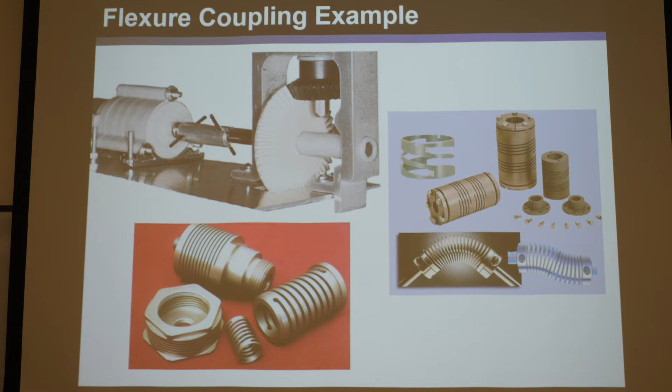Okay, so that's a great application for flexures, compliant mechanisms. These are some commercial flexure couplings. We're going to design one ourselves with FACT. Okay, so here we go.

All right, so say we have this shaft. Say a shaft goes through there and the other shaft goes through there. And we're going to design the flexures that join these two rigid bodies together so that they do the job of a flexure coupling. Well, remember the first step of FACT is to pick what degrees of freedom you want this flexure to achieve. And that's sometimes the hardest part of the FACT approach, so make sure you pick your things wisely.

In the case of a flexure coupling, this is the degrees of freedom you want. What you don't want is a red rotation along the axis, because that means it can compliantly deform with the rotation. You do not want a red rotation along that axis. You want it to be very stiff so that when this rotates, it passes that torque, it rotates right on through stiffly.

What you do want is compliance in all the other directions, right? If it's slightly misaligned at an angle, you want the two rotations here, so that as the motor spins, it can go on the off-axis shaft of the other part, and you want to accommodate the three translations in all the directions. So if it's sheared off a bit, it accommodates that, or if they're not bolted at the exact distance apart you wanted, it can accommodate that as well.

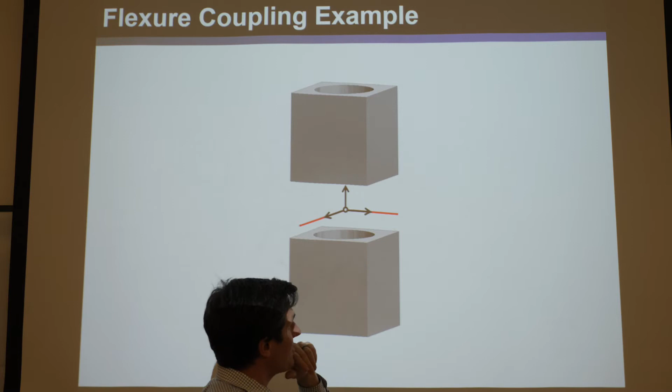So you've got 3 choices here. It's one of these things, and there's always one right one, of course. You can pause and see, go back and tell me which of these is this one. Well, you could look at this and say, what's 3 arrows added to each other? Well, it's a sphere, and right off the bat, there's only one sphere in here. It's right there. So you could know right away that's the right one, and take a look at it.

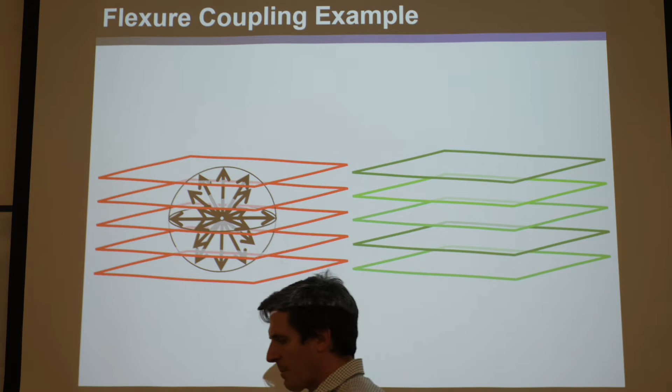So if we blow that up, here's the freedom space. It's basically a bunch of infinite parallel red planes with a sphere of black translation and a bunch of infinite parallel green screws, where there's screws all over the place. Notice I draw them in slightly different shades of green to show that they can be planes of any pitches. I do different shades of green for different pitches, but there's no rhyme or reason to the shading here. It's just screws of any pitch on these parallel planes. Okay, so that's that freedom space.

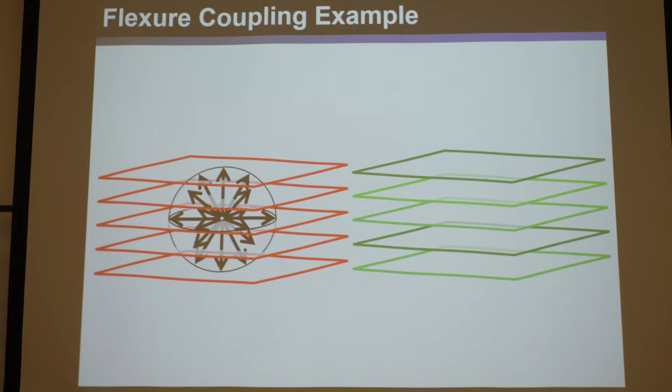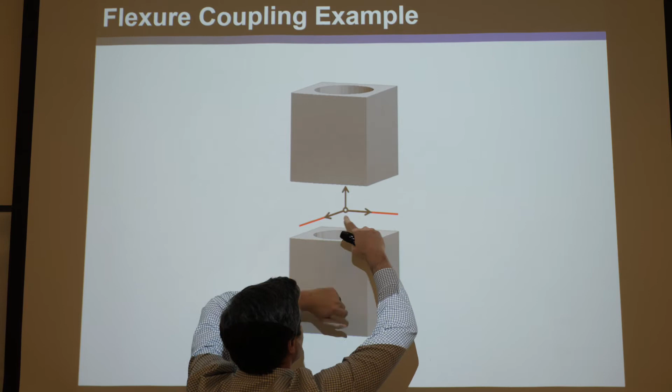Now you might ask yourself, how does this work? You can see how if you add these 3 together, they make the sphere. But think how do they get the rest of it? Well, if you add this plus this one, you get a bunch of red parallel lines that add all together and make this, and that makes a red plane, right? And then you could say, let's take this one plus this one. Well, it makes a bunch of red parallel lines that go up like that. And you do the same thing for this one, and so pretty soon you fill in not only the sphere but all these parallel red planes.

So I'll go back and show you. That one linearly combines, and that's all the combined motions you get. So if someone says I want a flexure coupling that just gets these, you say, well, that's great. You can get those, but you also have to get all these. There's no other way. That's the linear combination of them.

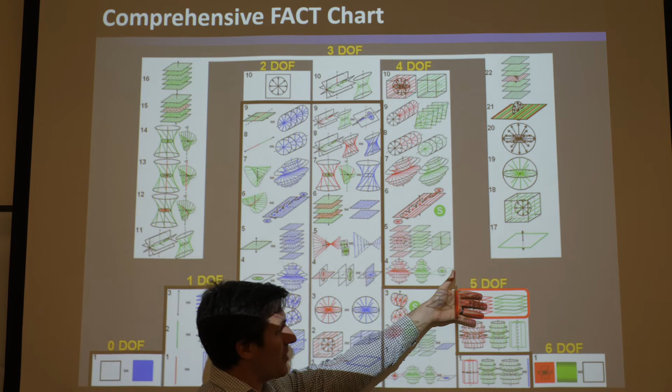So again, when you're synthesizing serial systems, you say, what do you want? And you find the freedom space. And you notice already, this guy, the freedom space you want, is it inside the parallel pyramid or is it outside the parallel pyramid? Well, it's clearly outside the parallel pyramid. It doesn't have a constraint space. You can't design a flexure coupling that gets that freedom space unless it's serial or hybrid, right? You can't do it with a parallel system.

So that's the first thing like that. Of course, that's why I picked it for this lecture, because you needed to do a serial system, and this is about serial synthesis.

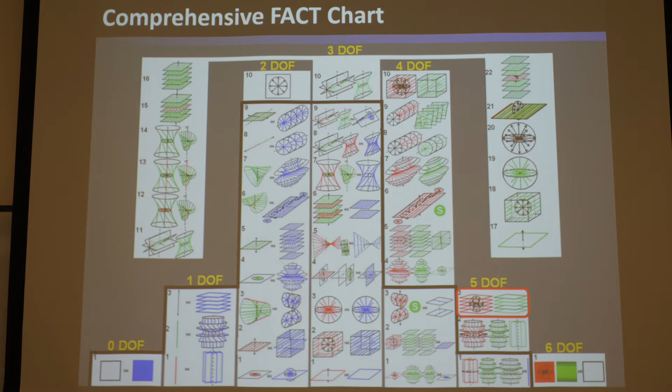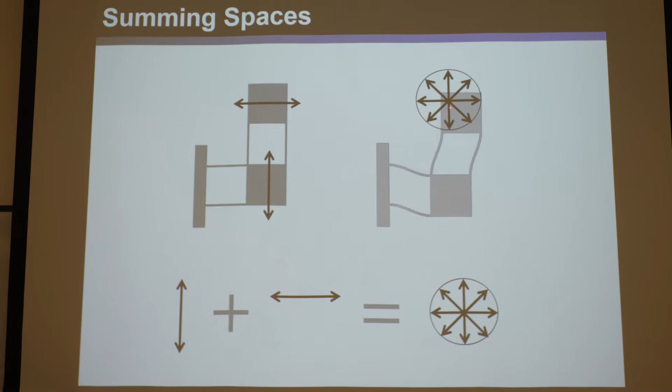Okay, so then what you do once you have the freedom space is you realize, well, look, if we want this freedom space and we want to make parallel modules stacked together that together achieve this freedom space, let's break it into intermediate freedom spaces. Take this and break it into these two intermediate freedom spaces so that one parallel module will get this, one parallel module will get this, and then together they'll get that.

Well, let's take this and break it. This is very easy how to break it. But let's take this, and there's many different ways you can break it. And the number of things you break off of it is the number of parallel modules.

So let's say you want just 2 parallel modules stacked in series, because obviously the more parallel modules you get, the more complicated the system gets. Generally, if you're going to design a serial system, you want to only have 2 stacked stages, because 3 or more would complicate things. Now, sometimes there are good reasons to do more than 2 parallel modules, but generally it's a bad idea. Okay, so let's just break this into 2 intermediate freedom spaces.

Many options, but one could be, how about we take one of these from this top plane? And by the way, there's no such thing as top; those planes span to infinity. But let's take it from this plane with the translation there, and then we could take the exact same thing from a different plane, just there. So two planes, we could take those.

Okay, these are 2 intermediate freedom spaces, and hopefully I can convince you that not only do these both lie within this, which of course is a condition for an intermediate freedom space, but the 2 have to add together to become this. So that if you have one intermediate parallel module that gets this, another parallel module that gets this, stack them together, you want them to linearly combine to be this. So they have to lie within it, which is obvious, they do. But do they add together?

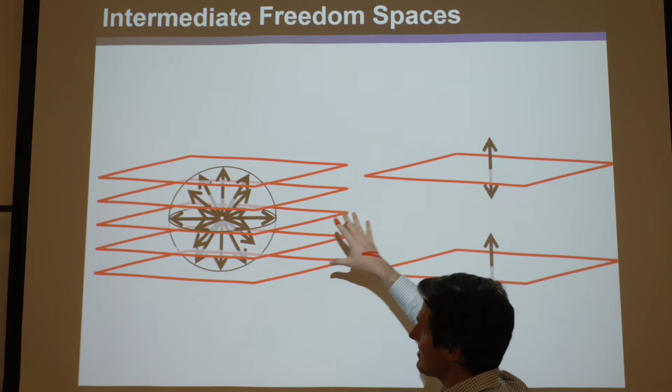So hopefully you can see very quickly, you could linearly combine these together to make that. So those are 2 fair intermediate freedom spaces that both lie within it and linearly combine to be that. You add them together, it does indeed equal that. So great. We could, and again, like I said, we just picked 2 of the same one and just located differently. They were both even oriented the same. That's okay. You could pick different ones. There's no rule on that.

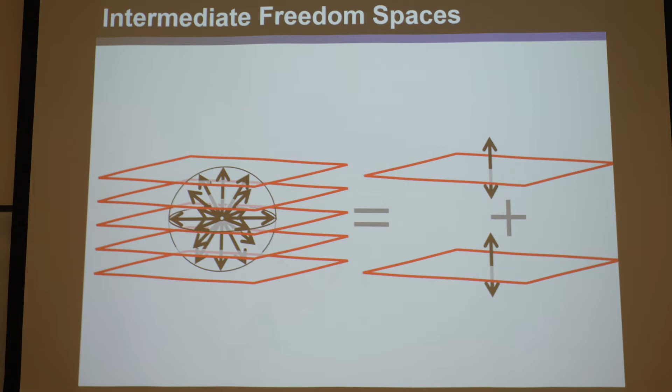Okay, but let's just go with this one, those 2. So then what you do is you take the intermediate freedom space's constraint space. That's just the blue plane. And by the way, you got to make sure it's in the parallel pyramid, right?

You don't want to pick intermediate freedom spaces that lie outside the parallel pyramid, because you need them to have constraint spaces to synthesize the parallel modules.

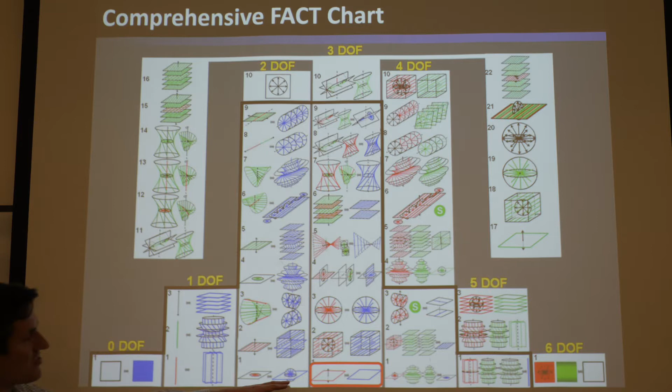So we'll take this constraint space, and that's the constraint space of this. Now we're going to synthesize them.

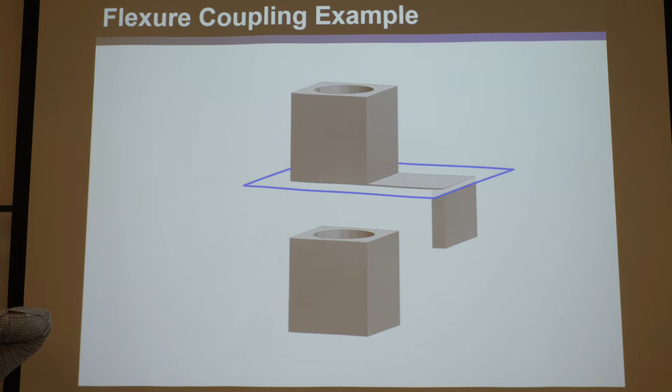Going back, you have this freedom space, the grand freedom space you want of the whole thing. Let's take one of the intermediate freedom spaces you picked, pick its constraint space, put its constraint space on there, and synthesize something that connects it to an intermediate body, say there. Again, we could use a blade because it's a blue plane.

By the way, I could ask you, since it's a parallel module, is that over-constrained or not? Elements just by themselves are never over-constrained, it just has an order of constraint of 3. So you'd say no, that's not an over-constrained parallel module.

So now we've done one, from one stage to the intermediate stage with the intermediate constraint space. Now let's take the other intermediate freedom space, take its complementary constraint space, and connect those. Again, this is not an over-constrained module. So this isn't over-constrained, that's not over-constrained, so this whole thing is exactly constrained.

This is a serial system now. It's got a ground, an intermediate stage, and a final stage. It's a parallel module, 2 parallel modules stacked in series, so it's a serial system. It is not over-constrained, it is exactly constrained.

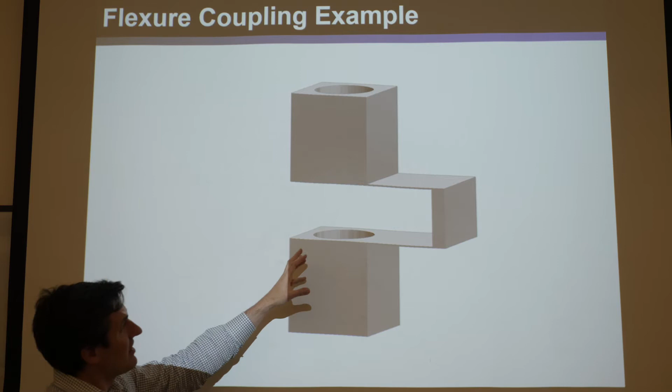The question is, is it under-constrained? Well, first of all, you could look at this and say, before we even answer that question, maybe we should over-constrain it.

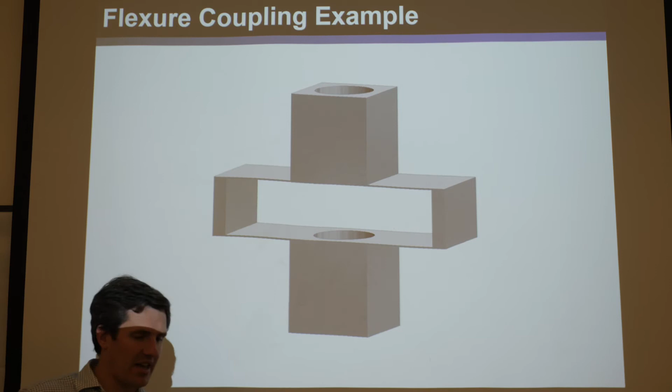Maybe we should make it hybrid by putting, here's one serial limb, let's put another serial limb on the other side just to make it symmetric, because this would make for a pretty poor flexure coupling. Imagine a motor spinning that around - this is imbalanced, and if you're rocking this motor around, it's going to shake itself to pieces. So that's a piece of junk design.

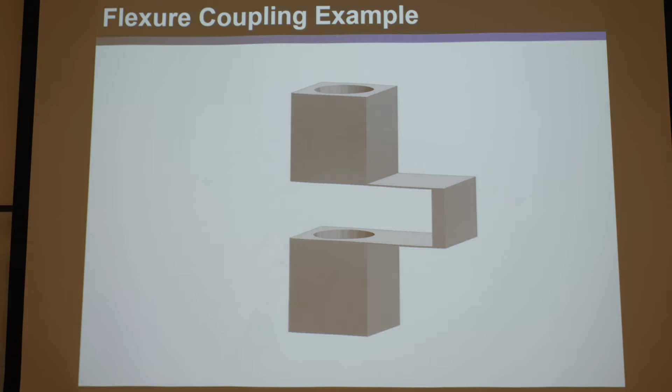So this would be a good way to put your common sense in and say, well, let's make it hybrid. And trust me, when I teach you how to do hybrid, this has the same freedom space, so you're not ruining anything. You are doing the same thing as this other limb, so you are now over-constrained. This is now technically over-constrained, but don't worry about that, we haven't gotten into hybrid yet.

But we just did that to make it symmetric, right? The question is this: first of all, does it work? Yes, it does, of course - we use FEA, and FEA makes things work, right? So this one can translate, this one can translate back like this, and this can translate like that, and it can rotate like that, and it can rotate like that. And it's super stiff with a moment about there.

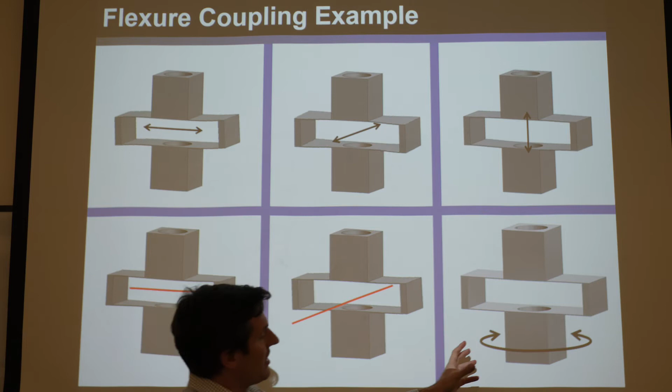So it got the 5 degrees of freedom we wanted, and it would have even if we hadn't added the other side to make it symmetric too, but it would have been weird with parasitic errors and stuff. So there's many reasons to make this symmetric and make it a hybrid - not only a balanced thing, but so that it has nice, clean, no parasitic errors that are bad.

But that wouldn't really matter for flexure couplings, right? You just want to accommodate the deformation. So here you see FEA confirming it works, and this does that. But again, I ask the question: is it under-constrained? It's a totally different issue from whether it's exactly or over-constrained.

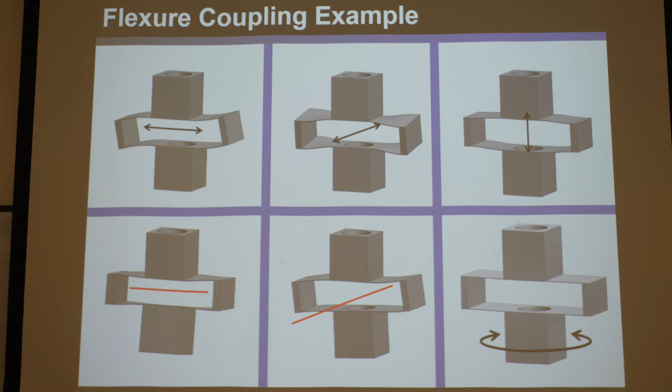There's a couple ways you could check it. Remember, you could hold the ground fixed with respect to the stage and see, are the intermediate bodies free to move? And yes, they are.

So it is under-constrained. If I hold this fixed with respect to that, these guys can freely, like dog ears, flap in the wind there. They're not constrained. It's under-constrained.

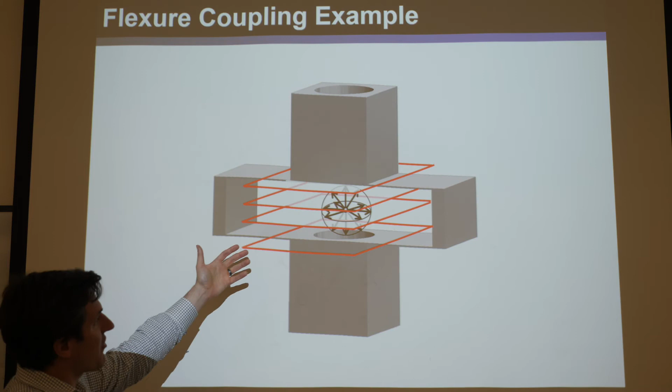By the way, we could have told this from the intermediate freedom spaces, right? So first of all, you can see, do these two freedom spaces have anything in common? Well, of course, they both have translations pointing in the same direction. These are the redundant degrees of translation, degrees of freedom, and that's why you see that flapping there.

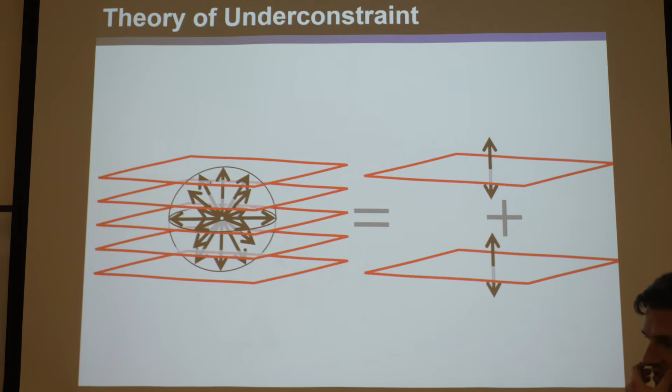We should have known from our counting trick with freedom spaces. When we picked the intermediate freedom spaces, these ones have 3 degrees of freedom, and this one has 5. So why did we pick two 3-degree-of-freedom spaces that sum together to become this, but their degrees of freedom add up to more than the number in this? 3 plus 3 is greater than 5 by 1, so we should have known the system was going to be under-constrained.

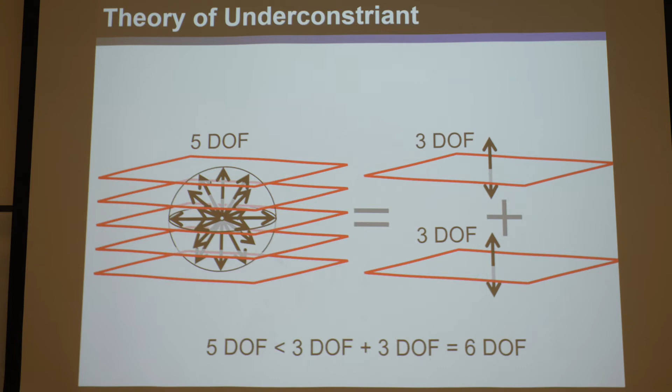For this example, we get twice the range here than we could otherwise. So you have to ask yourself: do vibrations matter, or does range matter? Do you really need twice the range in this stretching? The answer is no, you're not going to misalign it that badly, so you don't need huge range.

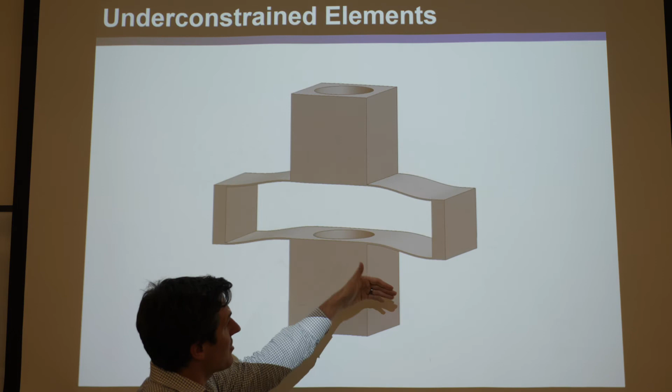And this is a motor, for crying out loud, spinning at who knows how many RPM. So you do care about vibrations, and you don't want these dog ears flapping uncontrollably while this motor vibrates around. So this is a bad design.

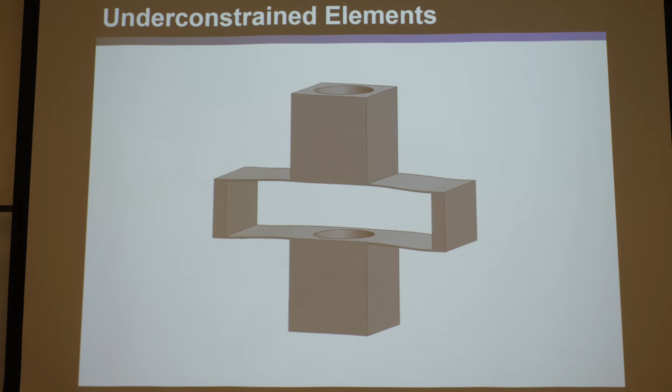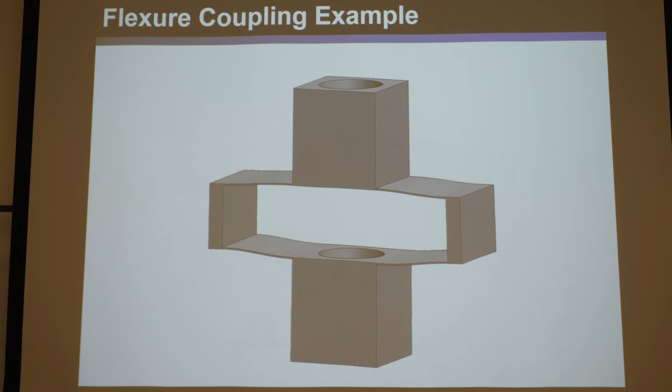We should have known from the second we were picking intermediate freedom spaces that the degrees of freedom should add up to 5. Then it wouldn't have been under-constrained, and we'd sacrifice range, but we certainly don't need that here.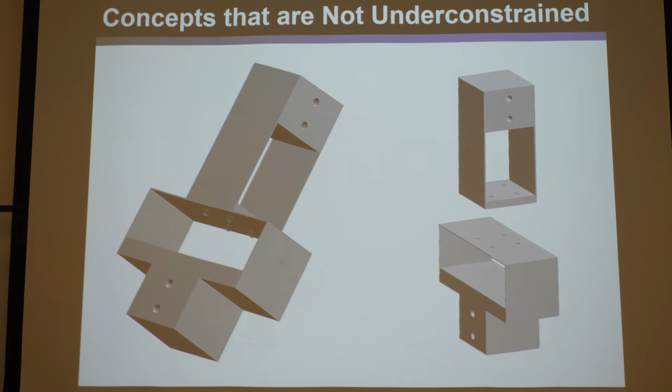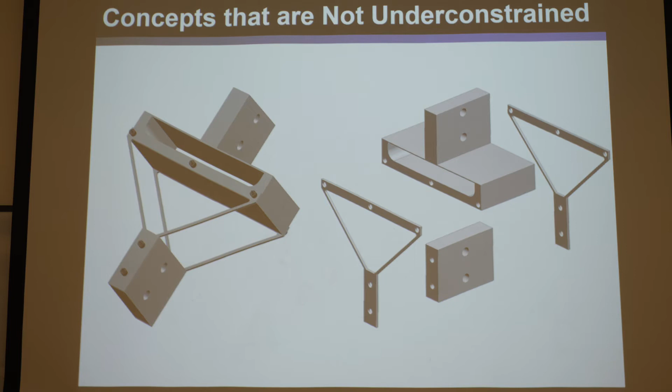This one is another design, but it gets even more impractical - not a good design. Here's another one that would work if you want to stare at how it's made in planar pieces. And here's another one that's just super complicated and absurd. But usually the simpler is the better.

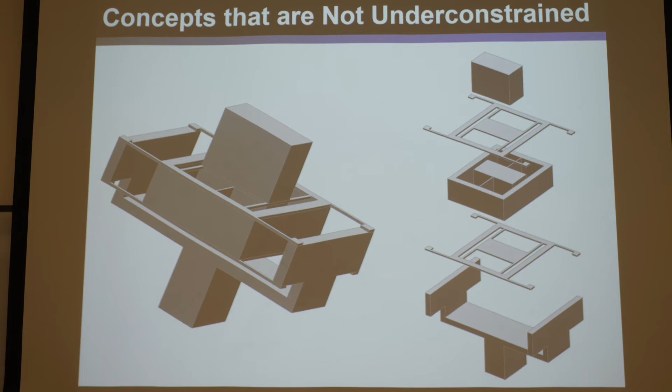But all these designs would not be under-constrained and would achieve those 5 degrees of freedom. They're all kind of serial designs, okay? Serial or hybrid.

I'll show you later if you're really interested in finding the ideal flexure coupling. I certainly wouldn't recommend any of the ones from that case study in truth. I will, in a later lecture, give you one of the best and simplest ones that works great - it has to do with a hybrid element, but you don't know what that is yet.

Okay, let's do another case study now, all the way from the top, that's super practical and goes through all the little rules you need to consider here in gory detail.

So this is actually a desktop lathe that my professor Marty Culpepper at MIT had all of his students in a certain machine design class build. They had certain aspects they would design and build and put together, and then they had a competition at the end where they'd cut stock on their lathe, and whoever could cut it the cleanest, the fastest, would win. The groups got to take their lathes home with them - an impressive course at MIT.

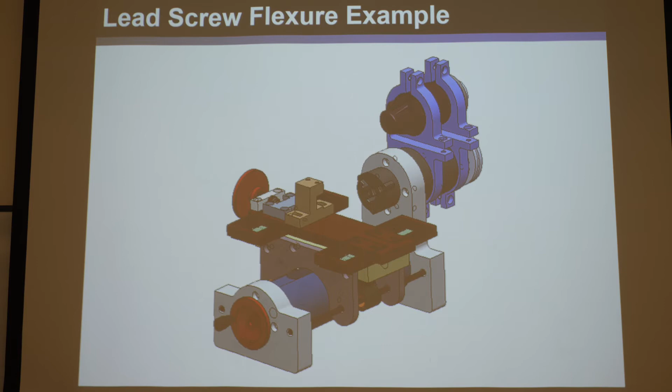I was the TA at the time, and I was interested in this, and they were having some problems with the design. First of all, here's the motor on top, and there'd be a belt that would rotate this. You'd stick your stock in there, clamp it down, and this would spin. Then here you'd stick your tool cutter in there, and you could rotate this.

There were flexures, you can see, kind of not terribly clearly, that would guide this back and forth to move the tool into the spinning stock. And here's the whole carriage, which would ride on these linear bearings. You rotate that, and it drives this back and forth, so you can cut along the stock.

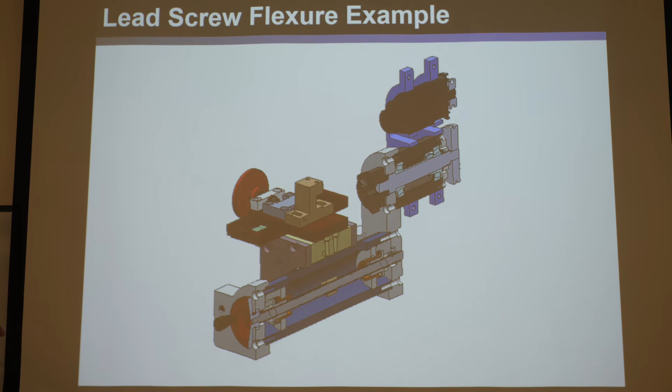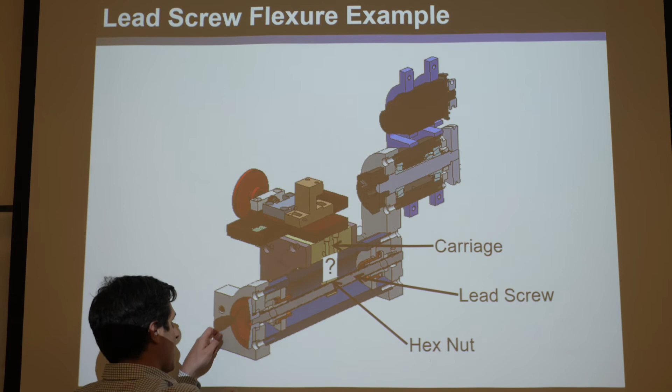So you can see how it works. This rotates a lead screw that has a hex nut on it, rigidly attached to this carriage. There's the lead screw, there's the carriage, there's the hex nut. As you rotate the lead screw, the hex nut was rigidly attached, so it couldn't rotate. As it rotated, this would move back and forth.

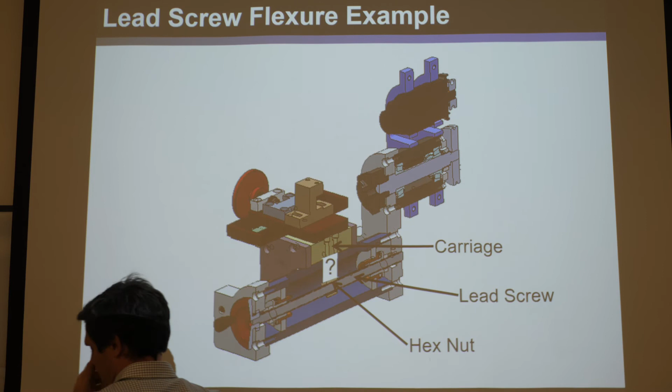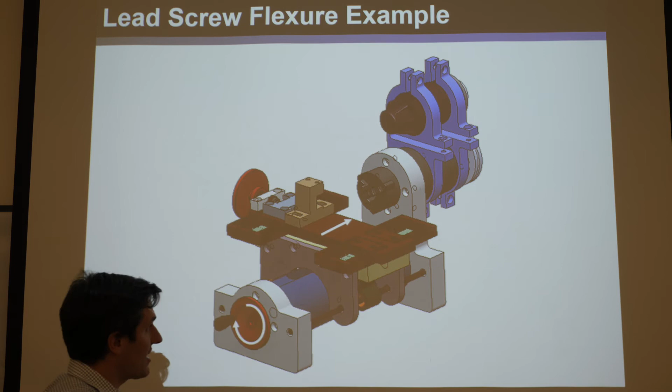And again, it was guided by, you have to see there's a flexure in here too, and there's some clearance on these things, but there was another flexure on the other side. Anyway, this was exactly constrained just by these linear bearings to guide a nice clean translation. The problem is that, and here's the structural tube it's in.

So the problem is that they found in this class that if they just rigidly attached this hex nut, just a big chunk of material stuck on the carriage, the system was over constrained, and majorly, because now you have this lead screw and all this stuff acting as its own kind of bearing with the linear bearings, over constraining the motion of the carriage pretty significantly.

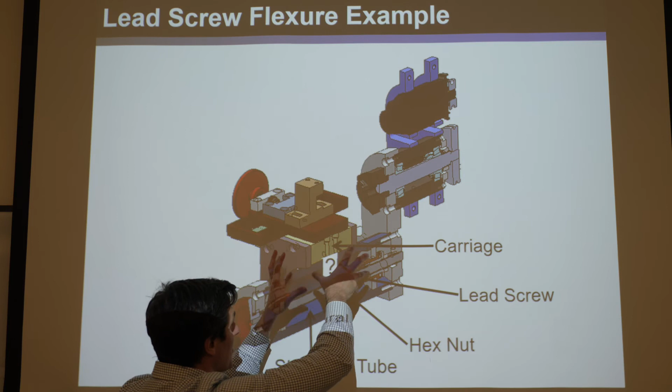And it was shown, it manifests as a nightmare, that this thing would stick and slip, and there'd be backlash, and all kinds of things that would manifest as chatter and nonsense, or stuff that looked really bad on the stock after it was cut.

So it became clear that a flexure was needed to interface the hex nut to the carriage, so that it would do the job of stiffly driving the carriage back and forth as this was rotated, but would not constrain what the linear bearings were already constraining, so it could freely move and not be over constrained.

So this was a great flexure problem, and at this time I had just developed the theory for designing serial systems. So as the TA, I thought I'd take a crack at designing a flexure that interfaces the hex nut with that carriage to fix this issue. I'm going to take you through the design process that I went through and how we fixed this problem.

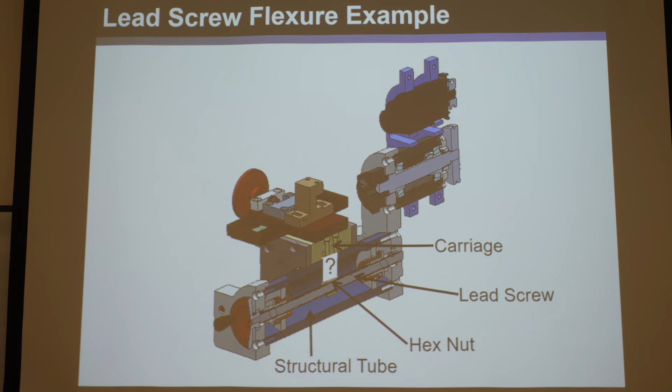Let's zoom in on it. Let's think of this as the ground, the carriage, and this hex nut is the stage. We want to connect these together with some flexure. The first step of the design process is to figure out what degrees of freedom you want, and what degrees you want constrained. What do you want to be stiff, and what do you want to be compliant? And define those.

That's by far the hardest part of the whole thing, what do you want. Particularly for this example, it was very difficult to find out what exactly we wanted. I'll tell you the answer: two orthogonal translations and two orthogonal rotations. But let me explain why that's what you want.

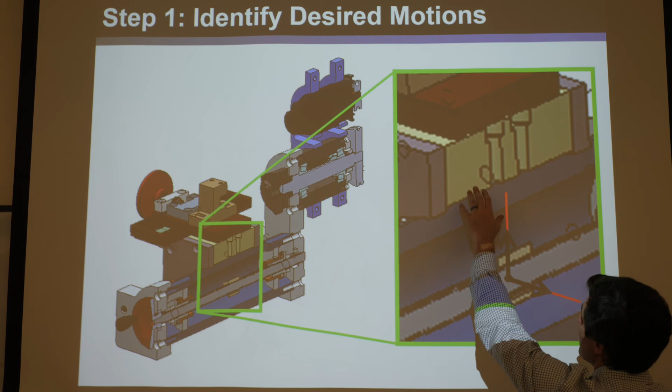So what you definitely don't want is a rotation about this axis, about the axis of the lead screw. That means if you had a compliant degree of freedom there, this hex nut could rotate compliantly with respect to the stage. That would not be good, because as you rotate this knob and rotate the lead screw as a consequence, the friction holding the hex nut between the threads would catch those threads and want to rotate the hex nut with it.

If there was a degree of freedom here in the flexure between there and there, it would just compliantly deform and the carriage wouldn't even move. It would rotate so much it strained, stiffened, and then got stiff, and then it would start moving. So it would make for horrific backlash if you did that.

If you had a degree of freedom rotation there, you would be going in one direction, then you'd stop, and rotate it a few times in the next direction, and the carriage wouldn't even move. It would just deform the flexure until it finally caught, strained, stiffened, and then it overcomes the friction of the hex nut. Then the carriage starts moving. So you want this to be very stiff.

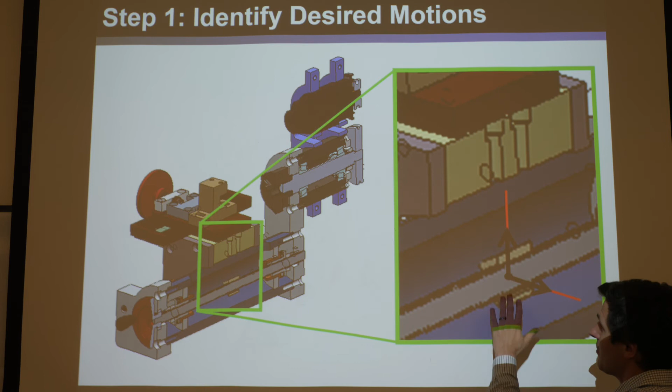The other thing you want to be very stiff is the translation. By the same token, you don't want the hex nut to be able to go forward and have that translation be deforming and not grabbing this with it. When the hex nut moves, you want it to be rigidly pushing, driving in that translation direction. So the two most important things to be stiff are that rotation and that translation. You want them to not be degrees of freedom, which is why they're not drawn here. Those are degrees of constraint, and you just don't draw those.

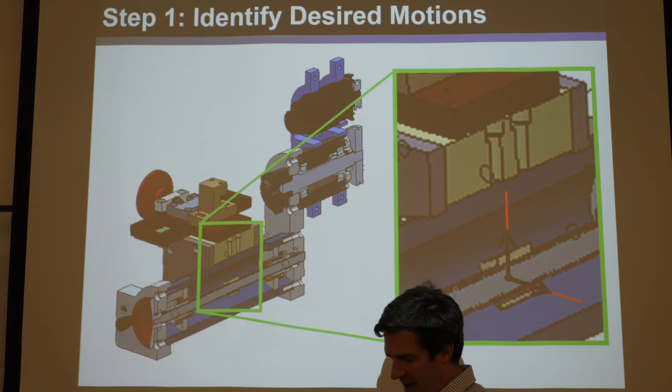The question is, why do you want the two translations here? A good way to think about it is just imagine the system hopelessly deformed. Imagine the lead screw is bent like a jump rope. It's just hopelessly bent, because in reality it is bent like a jump rope, you just can't see it because it's finely bent. But always imagine all the errors it could have, as if it was made of rubber and hugely out of whack.

If this was a jump rope and you're rotating it, then that hex nut is moving up and down and side to side. And if it's not assembled perfectly and it's not perfectly straight, which it's not, it's like a jump rope, you need to accommodate those motions up and down and side to side with high compliance, so it doesn't jam the carriage, and the linear bearings will do what they're supposed to do. So you want these.

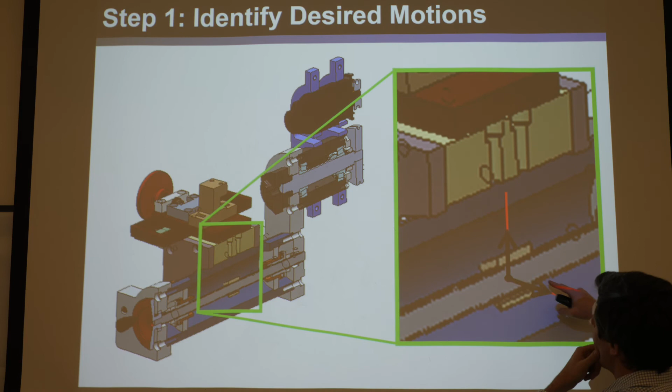And by the same token, you want these rotations, because if you think of a curved lead screw and a hex nut following along a curved lead screw, it needs to rotate as it goes around the curve. Say this is the hex nut and it's going along a curved line—you can see this thing is rotating. So you need rotations in both directions to be compliant, so it doesn't jam the carriage either. So you want these four and you don't want the other two.

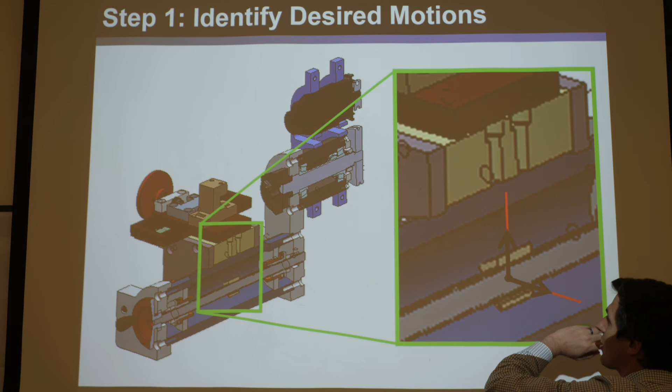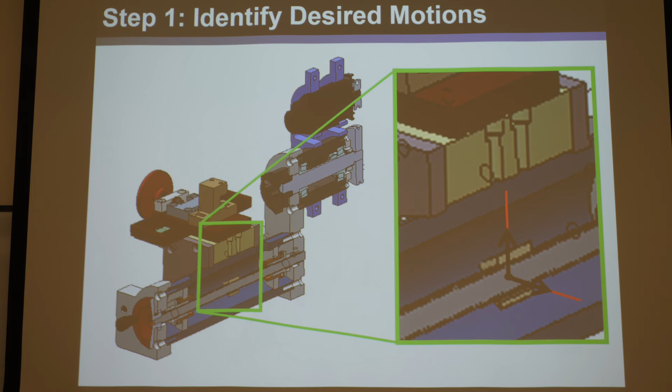It took us a long time to realize those were the degrees of freedom we wanted to achieve. Then the rest of it is just following your way through systematically with the FACT approach. So if you want those freedoms, the question is, what's the constraint space? What's the freedom space of those four degrees of freedom? You can pause to think about it, or I can step you through here.

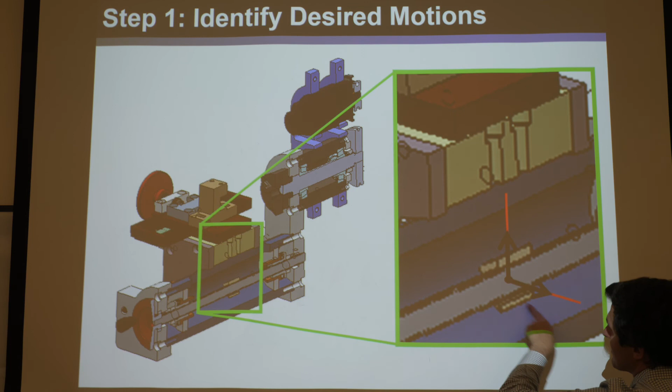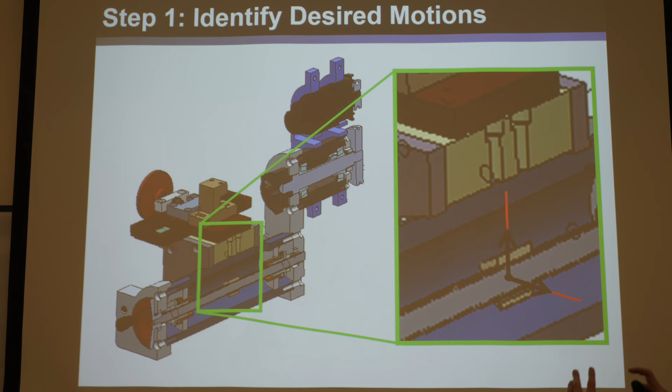Start doing your adding thing. What's the translation plus the translation? It's a disk of translations. What's this translation plus that rotation? It's a plane of parallel red lines. What's this translation plus that rotation? It's a plane of parallel red lines. And all those parallel lines add together to make a bunch of disks. So pretty soon you can start visualizing a disk of black translation arrows and a bunch of disks of red translation—a bunch of red rotations on a bunch of parallel planes.

From that you look at the FACT chart. That's what I do in my head to find the freedom space, but you don't need to. You can pull it up and say, okay, we want those degrees of freedom—there are four of them. Let's look in the 4 DOF column because we're pretty confident they're all independent degrees of freedom. Let's find it. We have 10 options—which one is it? Well, I just showed you how you could linearly combine them, and you'll see it's option 8.

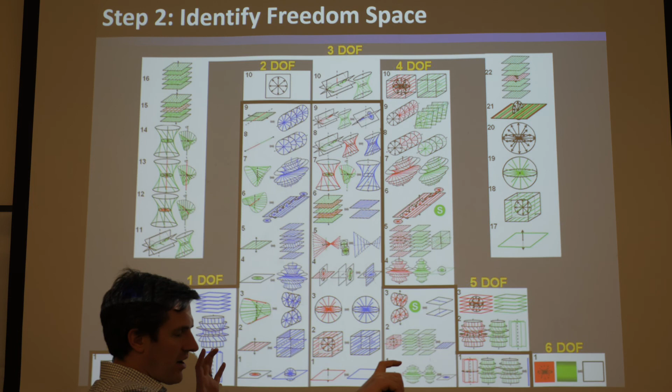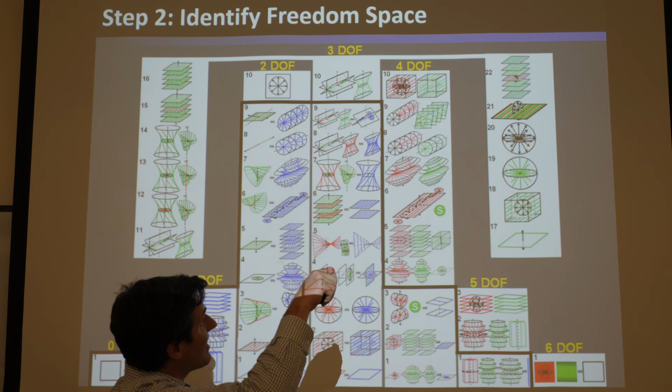Okay, there is your disk of translations, and there's all your other infinite parallel disks of rotations where there's an axis that's perpendicular to them. This one has an axis skewed from the others - these are still red disks on parallel planes, but this dotted line through their center is not perpendicular to them. Here's the one that's perpendicular, so it has to be in here, and it's that one.

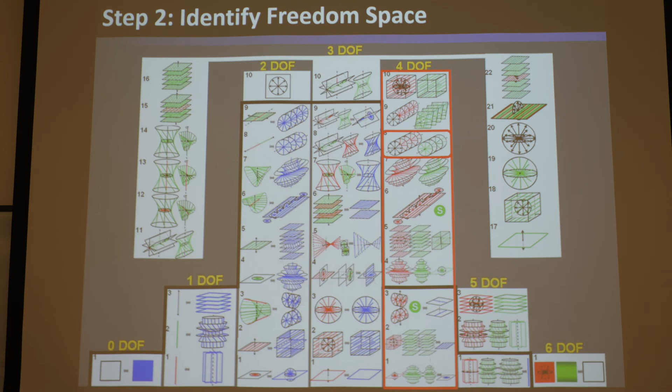Okay, so we found the degrees of freedom. We found the freedom space in the right column. That's the freedom space, and you can see it blown up here - here's the 2 translations you wanted, and here's the 2 rotations you wanted.

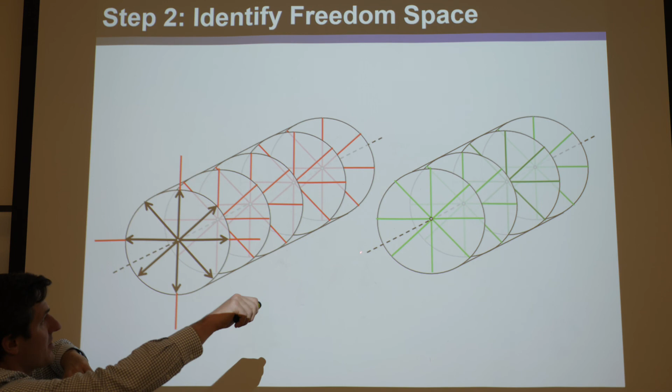Of course, there's a red disk on top and a bunch of red disks out there, and then there's a bunch of green disks of all these different pitches. It's obviously on top. These 2 dashed lines are on top of each other - I just don't want visual clutter.

Okay, so you can see how the 4 lie within there, and how you get all the other ones simultaneously.

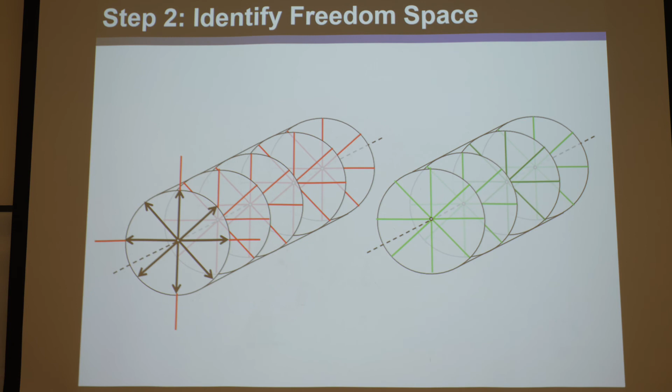So we found the freedom space. Now step 3 is ask yourself: can you make it parallel or serial? Because in this case, if you could make it parallel, it would be really nice, because it's got to fit within a structural tube, and it's got to be pretty small, and you want it to be simple, etc.

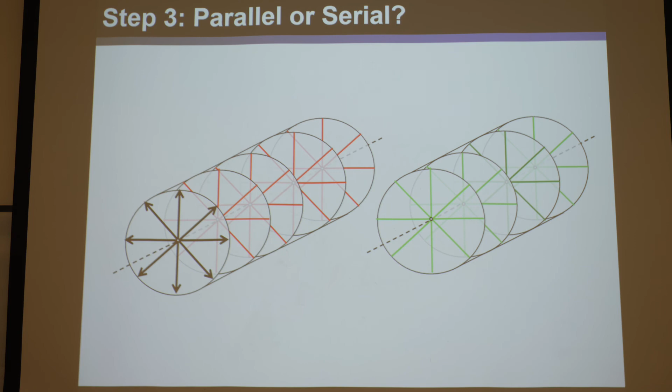So let's look at this and ask ourselves, is it inside or outside the parallel pyramid? The answer is it is outside the parallel pyramid. So you don't even have the option to make a parallel version - you can't make a parallel design that does this. So unfortunately, it has to be serial, okay?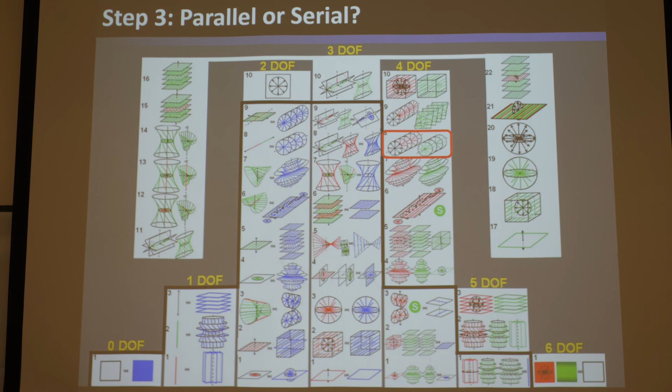So then the next step is we're going to choose intermediate freedom spaces. Now remember, intermediate freedom spaces have to lie within the main freedom space, which means they're always going to be to the left of it - all the spaces this way are smaller than that space. So if you want to find all the spaces that lie within this space, you need to look to the left of it in the FACT chart.

And then you need to identify which ones lie within it. So it's not only things to the left of it, but they have to be within it - not everything to the left of it lies within it. And the other thing is it better be in the parallel pyramid. So not only do you need to pick intermediate freedom spaces that lie within it and are therefore to the left of the column, but they better be within the parallel pyramid so that they have actual constraint spaces that can be used to synthesize their parallel modules.

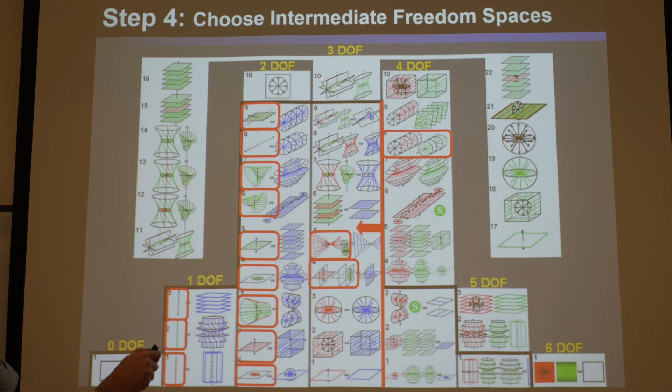Because you don't want to find - gosh, that would be terrible - to find one of these that lies to the left and in there, and it turns out it doesn't even have a constraint space, so it's a no good intermediate freedom space. So intermediate freedom spaces better be in the parallel pyramid to have constraint spaces that you can use to synthesize parallel modules to even stack.

Okay, so we're only considering things in the black parallel pyramid, and we're only considering things to the left of it. And there's a number of options - they're boxed in red here.

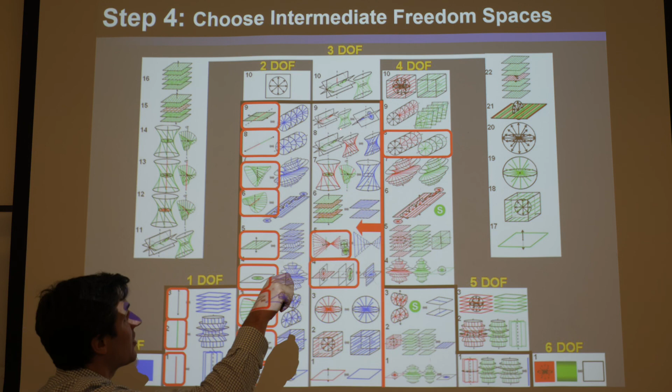So if you're familiar with these shapes, you would see this doesn't lie in there - none of these lie in there. This does, this hyperbolic paraboloid that rotates through - there's a red line from every disk that rotates through, so that does. This one does too, because there's a disk and there's a plane of parallel red lines.

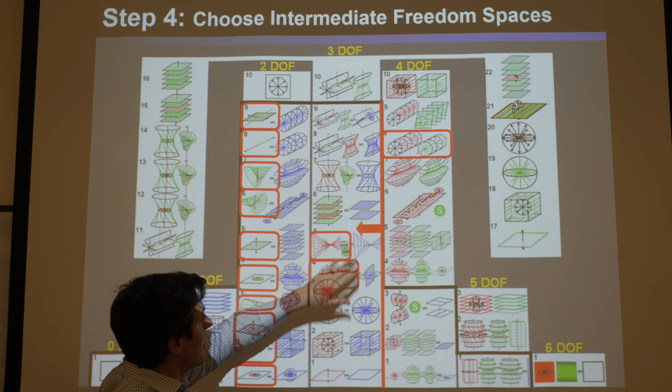None of these do. So only 2 from the 3 degree of freedom column that are in the parallel pyramid satisfy it. All of these in the parallel pyramid lie within there, and all of these do too. And this one's trivial, right? This one's empty, so of course it lies within it. But those are all the options. If you have a difficult time...